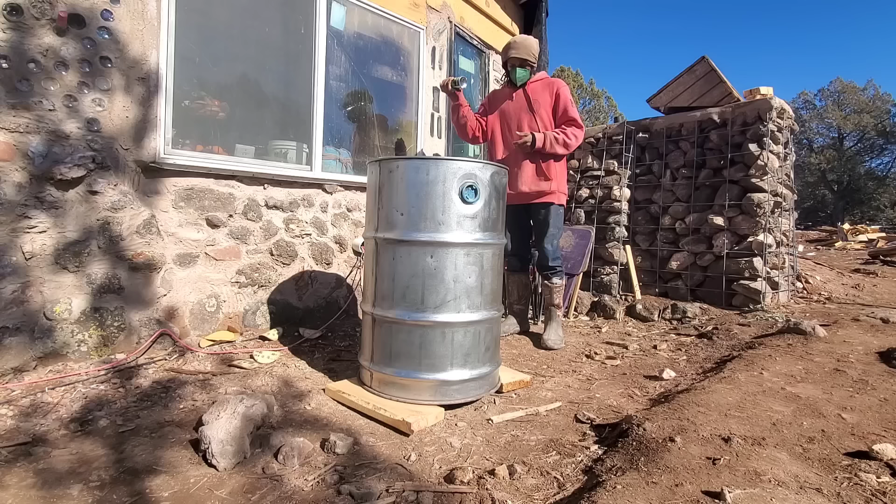Most people in the world heat their homes with wood, and they usually find the highest rated wood stove they can get. That's boring. Everybody got the same wood stove when there's an alternative. And although there are highly efficient wood-burning stoves out there, we're actually creating an even higher efficient wood-burning stove, the Rocket Mass Heater Bench. There are some people that know what a rocket stove is, and that's fine. And what actually makes our Rocket Mass Heater Bench different is the design called the stratification chamber.

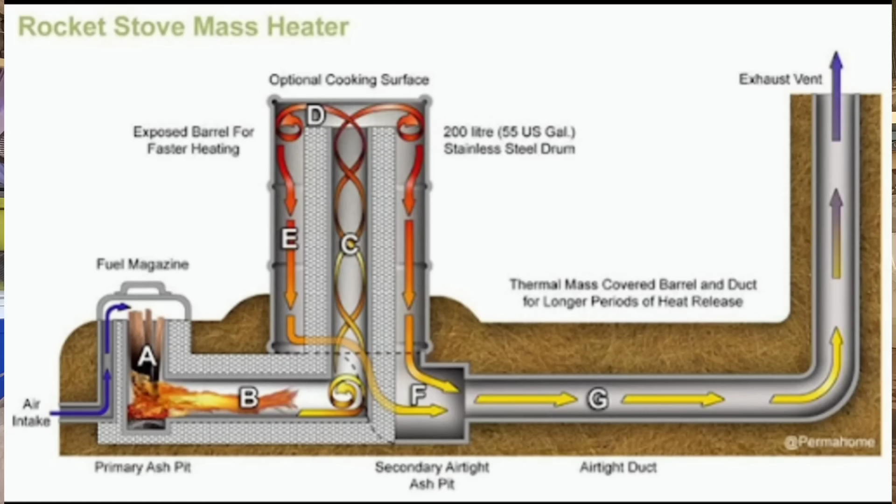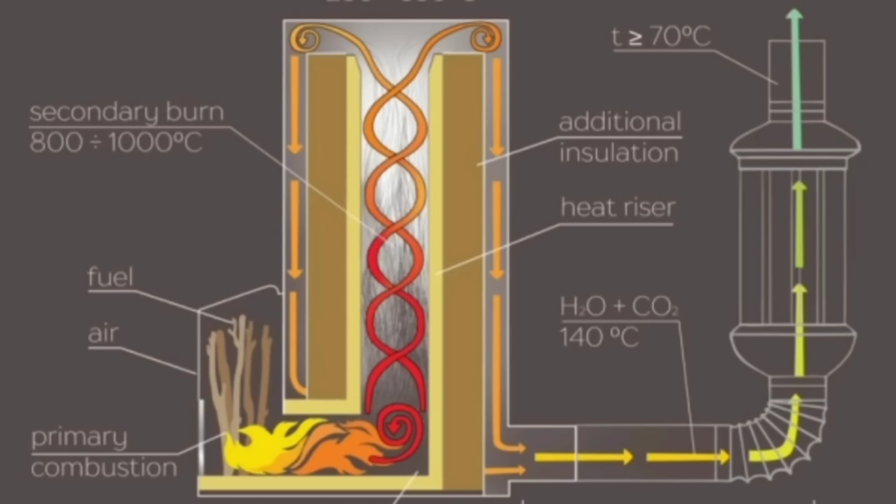Now, most rocket mass heaters work by having the hot gases or the hot exhaust run through the pipe and run through a series of ducting that kind of zigzags or snakes its way through a thermal mass bench, usually made of adobe or cob. And one drawback with that type of design, with all of the pipes at least, is that you have to be pretty precise with the angle of the pipe flow. So there's a bit more precise calculations and meticulous things you have to do to make sure that that kind

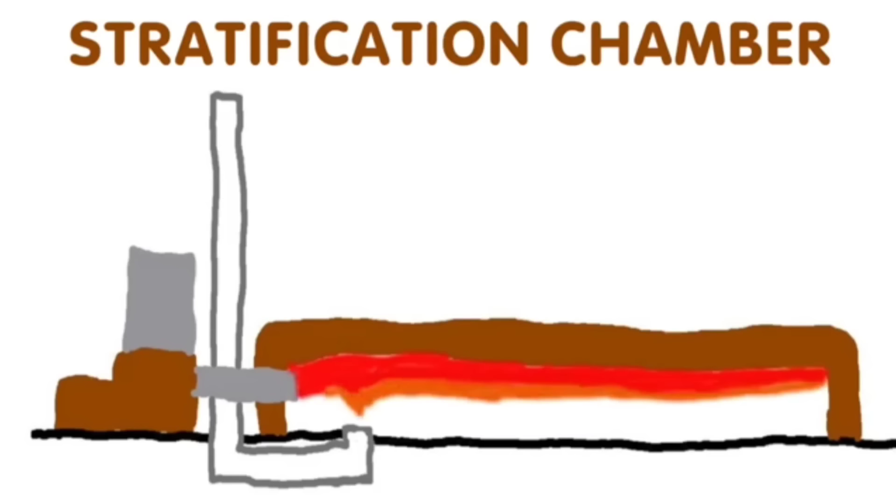of stove design works. Efficient as that design is, our design will be different from the rest because we will be using the stratification chamber design on our Rocket Mass Heater Bench. And that means instead of tubes, we're actually using this open bell, open bench shell design here, which will naturally stratify the incoming hot gases, and the cooler gases will sink. And then that's where the J-tube comes in, and all of the cooler gases are able to flow into that tube, which actually connects to this exhaust pipe here, leading to outside.

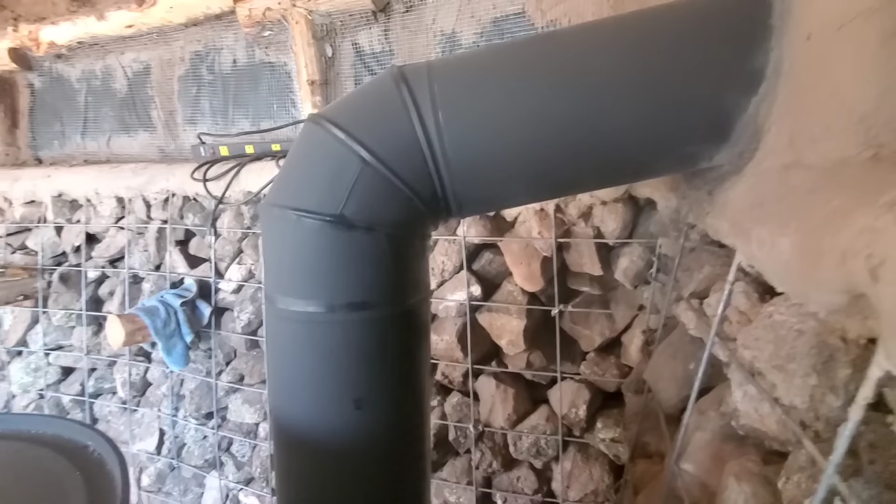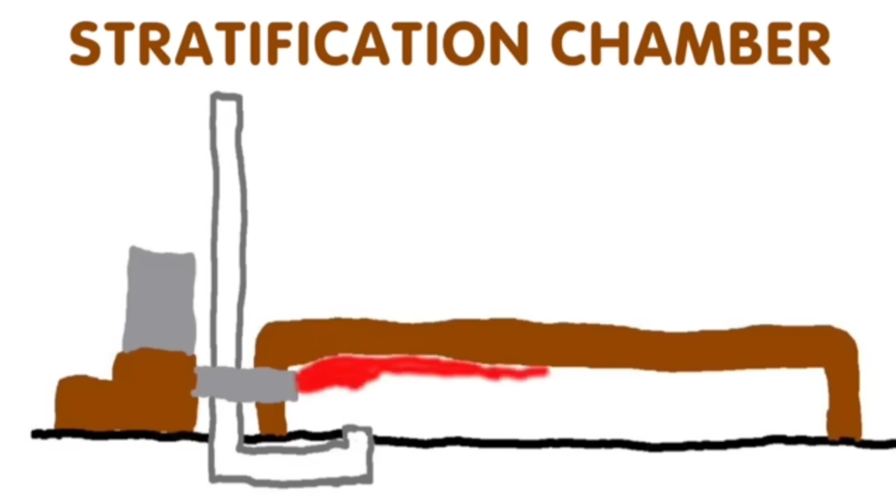But the benefit will be that it's sitting pretty close to the barrel, where it'll actually heat up this pipe and will create a siphon effect in the pipe itself because it's heated up. So then that'll actually help with the bench sucking out all the cooler air that's inside. So that's the biggest benefit with this heating system, the even distribution of the heat, as well as the lack of complexity to the whole system overall. Less maintenance, less things to go wrong basically.

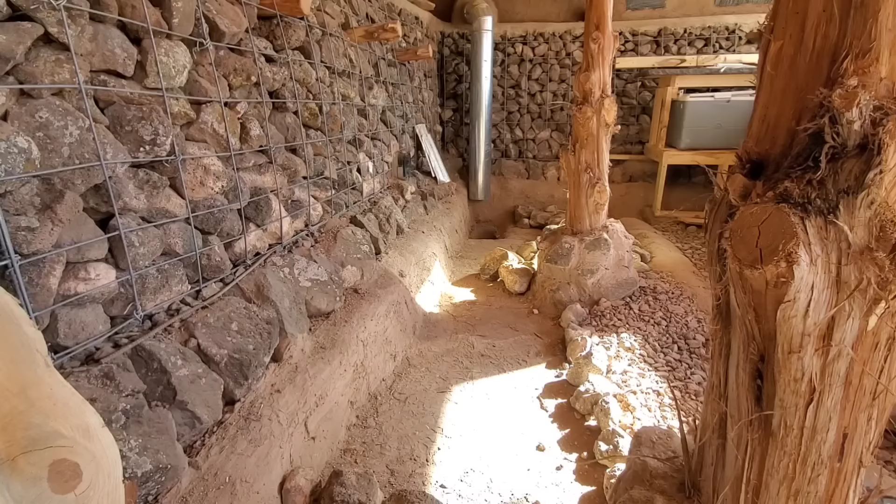Hopefully you understand the explanation of what a stratification chamber is. And we're starting this from scratch, using the materials from our property. So we're going to start at the base of the rocket stove and how I started and built everything up to get the platform and everything else, so you'll see that.

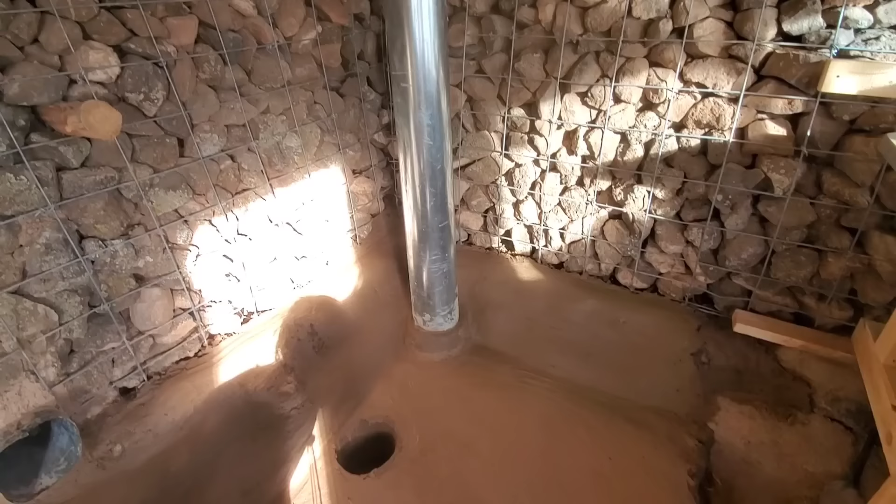So now we've got the outline and the base laid out for the Rocket Mass Heater Bench. So now we'll start the outline of the whole Rocket Mass Heater itself.

So for the bench part, we're going to be using leftover pieces from the cattle panel from all the gabion baskets. So I've already arched these, and now we're going to get these all set in place.

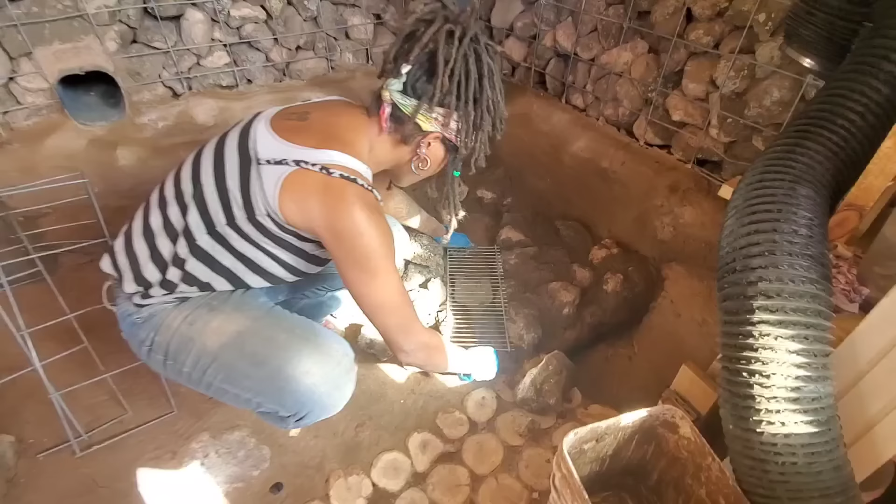So now that we've gotten the outline for the rocket mass heater, Nika had mudded all of the platform, and she's mudded a little bit of the base and the outline. So now we're gonna stack more rocks and get the rest of the base built up. And you'll see how Nika's mudding all that.

So you'll be able to see how Nika's used the chicken wire to make the forms for the size of our tubing, and the diameter of our tubing is going to be about 8 inch. So you'll see how all of that is going to be used for creating the form on the rocket stove.

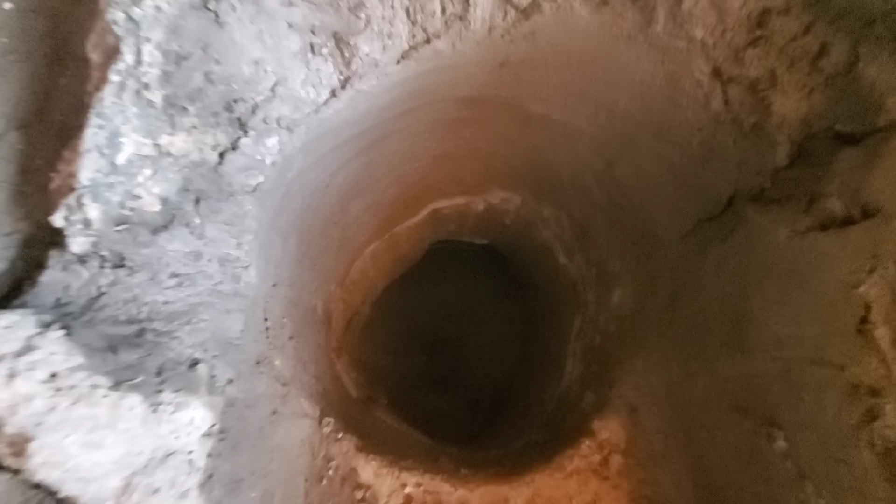So the major key aspect of our rocket mass heater build is utilizing the natural materials that we have on the property. You can see throughout all of our build videos how much stone we actually have around here. But we're actually focusing in on the lava rock, which has all these really nice large pores and little pockets on it. And we're gonna be using these kinds of rocks for all of the build here for the high heat capabilities, as well as the insulative capabilities of the stone itself.

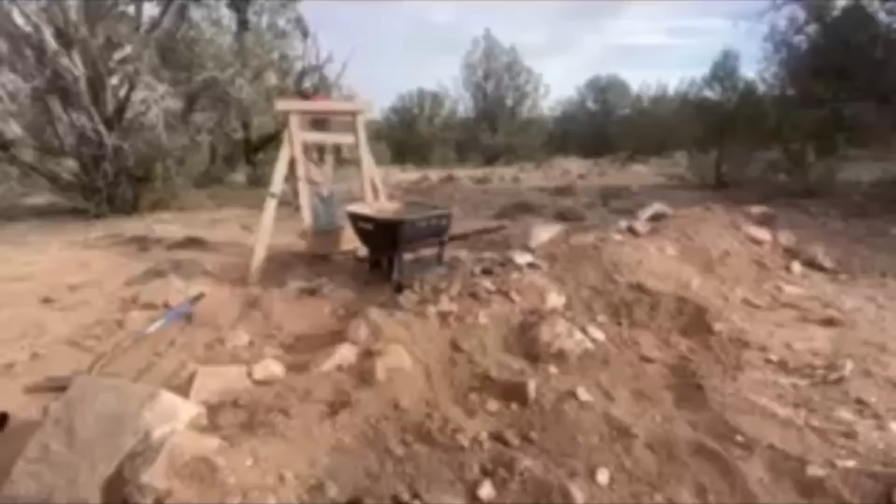But we're pretty fortunate we can find all these little pockets of this really nice lava rock to be able to collect, as well as Nika's using the sifted material from a lot of the earthworks and creating further earthworks with that. All right, let's get back to the stonework and Nika's mudwork.

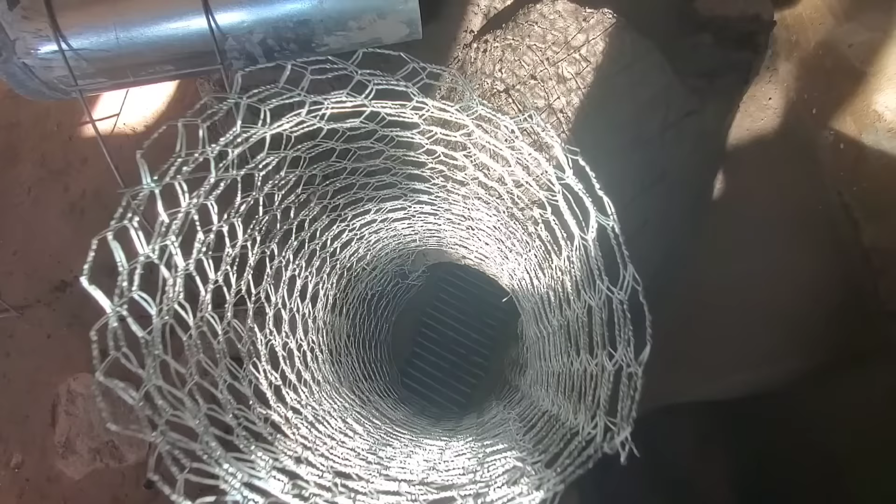To maximize the efficiency of the rocket mass heater, we're actually going to add this coiled copper pipe to the exhaust part of the rocket mass heater so that it's in the hottest part, and that way we're actually going to be creating our own hot water after we create the tank off to the side.